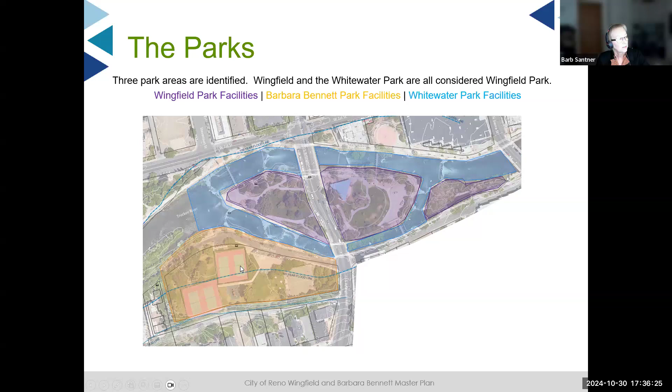So as we talk about the parks, we have them split up into three areas. We're going to talk about Wingfield Park, represented in purple here. And then the Whitewater Park, which is actually part of Wingfield Park, but we've separated it for purposes of presenting the amenities. And then Barbara Bennett Park, which is on the south side of the South Channel here.

So to do a bit of a recap on the parks, I wanted to remind everyone of what was involved in Concept A. Concept A was a plan that kept the existing amphitheater in the existing location and regraded the turf a bit.

This would have everybody able to look at the amphitheater in one graded area, replace a bunch of sidewalks with new vehicular rated sidewalks on both sides of the park, added some picnic nodes, added a pedestrian bridge to connect Wingfield to Barbara Bennett, and had the same alignment of the street and parking along the river, but we added a pedestrian walkway and trees.

And then we kept the two basketball courts, kept two tennis courts, and made this into pickleball courts, and shifted the playground and added shade structures over in this area. So that was the gist of Plan A.

In all three of the concepts, we have proposed replacing all of the existing lighting because it's pretty dated, and adding security cameras that would tie into the City of Reno's IT system so the activities could be more easily monitored. We also propose limbing up the trees so it's easier to see into the parks, and again, monitor the activity.

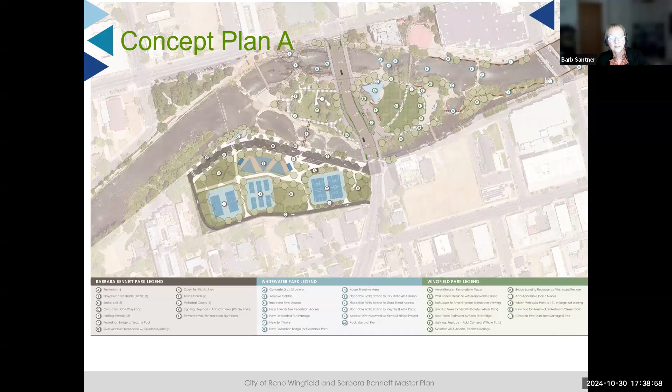So in Concept B, we propose leaving the amphitheater in the same location, but replacing the structure with a new structure that would really be a shade structure on some supports, not having solid walls in the background. The other aspects of the park were essentially the same as in Concept A for Wingfield, and the other aspects of the river improvements were also the same as in Concept A.

But in Concept B, this driveway and circulation is pulled back a bit from the river, having a larger pedestrian walkway feature. We had one basketball court, and then in this area a combined one basketball or one tennis court and three pickleball courts, and shifted the playground up in this area closer to the roadway.

I neglected to mention also that in both A and B, we proposed replacing the restroom and moving it a bit east. Another thing in A or B, in this area, we would have a pad for a portable green room restroom.

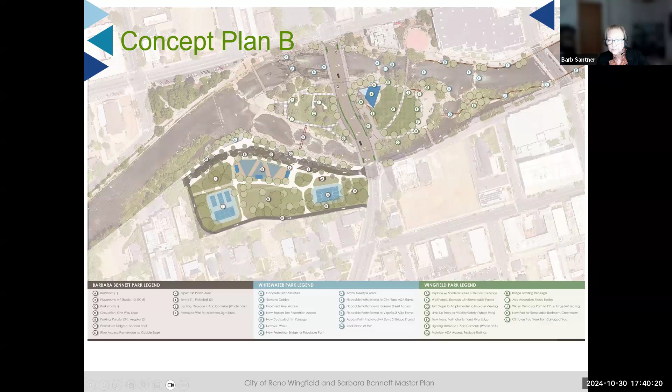Concept C had a bigger change in both parks. So in Concept C, we proposed removing the existing amphitheater and moving it down to the east side of the park and replacing it with a shade type of structure.

And then having this area near Arlington Avenue be used for food trucks and vendors and the portable restrooms. The biggest reason to propose this is because the natural grade from Arlington Avenue east falls in this direction. So by relocating the amphitheater, this can just be graded in a natural fashion, looking down at the new amphitheater.

And also, this provides really good natural flow of pedestrians from Arlington Avenue through the food truck area and restroom area down to the amphitheater.

So what that would look like is that the existing flood wall would be removed and this would be terraced back with boulders, just like all these other edges are terraced back when the Whitewater Park was built. It would afford a lot of new green space and access to the river on the South Channel.

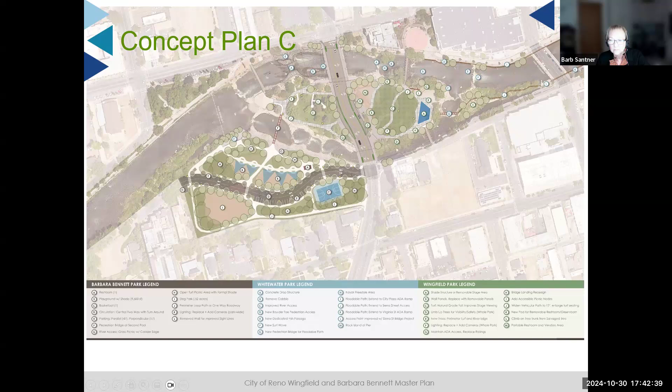So we presented those concepts last year, and then we had a survey. The public meeting where we presented those concepts was November 16th, 2023, and that was followed by an online survey, our second one, held this spring from March 4th to April 1st.

I wanted to add that at the actual public meeting, the sentiment on option C was higher. People definitely preferred C for moving the amphitheater, and also C for Barbara Bennett Park and realigning the road.

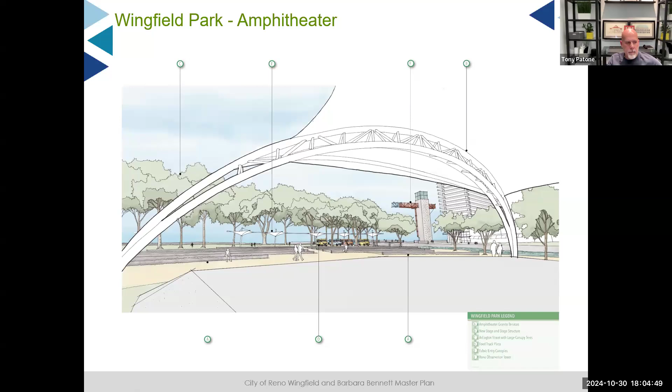All right, so Jack can talk about the observation tower. And Jack, at one point, I've got the video kind of queued up. So let me know when you want me to turn that on.

And you're on mute, by the way.

There you go, old man in technology. All right, I'm Jack on Robitussin. I'm fighting off a cold for the participants that are zoomed in. I'm not at my best, but I'll try.

I've been in Reno for 35 years, practicing architecture. This was a fun opportunity to work with Stantec and Barb and Dalton and Tony. Tony and I worked together several years ago, and I've been to many events at Wingfield, seen a lot of concerts there. It's got a special place in my heart. I feel like the park's a little bit long in the tooth, kind of like me. So it was fun to work on something to give it a whole fresh aesthetic and functions, and just a real pleasure to work on.

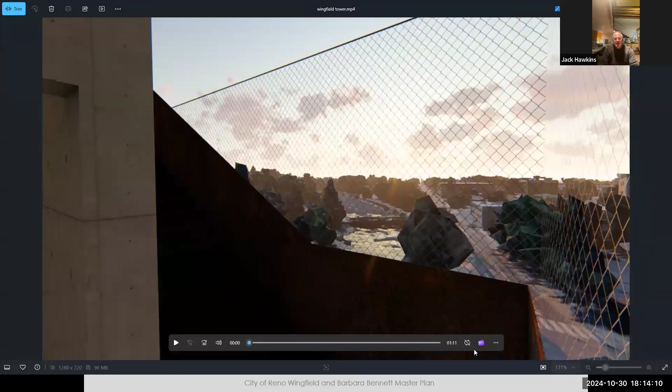That's the presentation for the tower. It's fairly ambitious, but we think it could be something really fun for the city of Reno, and just a great amenity to the city, particularly Wingfield, which is a very special park.

Uh-oh. What happened? Jack, right now the video is showing. Actually, I'm not sure if your screen is showing it. Oh good, okay, they're running the video. Great, no, I don't have it.

Right now this video is showing a lot of the great views that Jack mentioned. Once you get out to the end of the tower, looking down at the Truckee River, out to the Sierras, and this is a night view now. Tony, if you wanted to narrate this too, I wouldn't stop you. But I'm just trying to emphasize a lot of what Jack had been talking about in his presentation.

Basically, the materials would be rusted Corten steel and concrete, and glass are the three major materials. And I didn't mention, it does sit in a little pocket park right at the corner of First and Arlington.

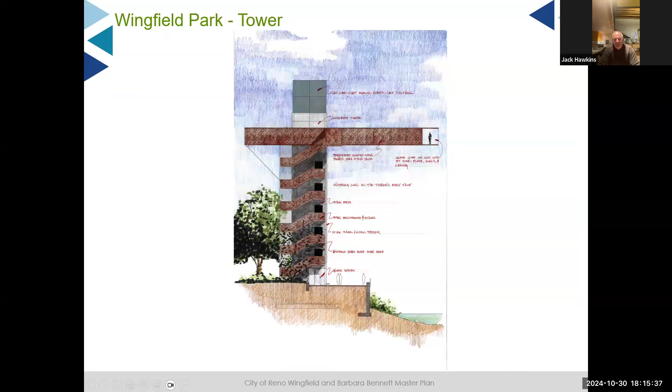Barb, I think you're muted if you're talking.

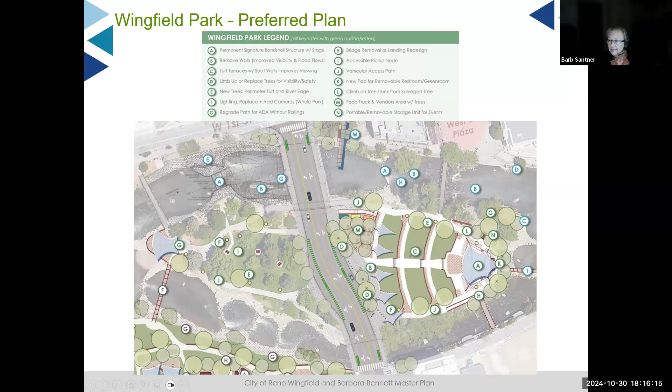Anything else you want to add on the tower? Jack or Tony? I think that's all for me. Tony, do you want to add anything?

No, I just think it'd be an incredibly beautiful, like you mentioned, a landmark for Reno City and for downtown Reno. A place that would draw people from, similar to, when Jack and I were discussing this, we mentioned some famous landmarks around the country, around the world, like the Bean in Chicago. It would become one of those iconic landmarks for downtown Reno, for Reno City, that would draw people and be an incredible feature for that part of Reno, located right on the Truckee River. It'd be an incredible amenity to the city, so it has a lot of potential, I think.

All right, well, thanks for all that information and detail.

So the next aspect of the preferred plan that we want to explain is the Whitewater Park improvements. Jake, are you okay going through these? Yeah, absolutely, happy to.

This is pretty similar to what's been shown before for those keeping an eye on this, working from upstream to downstream on the north channel. The first thing you see is reconstructed drop two, which is actually part of Arlington Bridge. We're really just showing it here for reference. That will be happening next summer already.

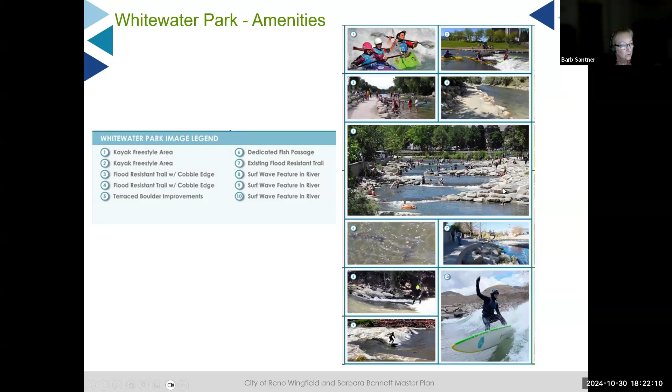Terrace this bank back using this terrace boulder so that it is similar to all these other nicely done edges at Wingfield Park.

We're showing replacing the current restroom with Portland Loo style restrooms, which are the ones that are now being used down on the river. They allow one person in them, and you can kind of see underneath so that there's less opportunity for undesirable activity in those restrooms. So we're proposing two of those.

And then this would be the accessible parking for those restrooms in diagonal parking. But this circulation would be one way coming in and one way going out, just like it is now. So that's a modification from our concept C, in that we're basically leaving the path and circulation route the same, but just moving this internally.

This area is for people to access this ramp. This is actually a ramp that's going to be modified with the Arlington Avenue Bridges project, where it's going to be widened so vehicles can get down into the river, so people unloading boats can bring them down in this area too. This is also ADA accessible.

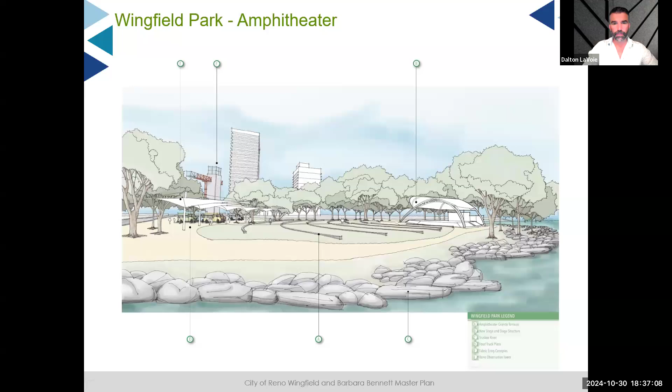The next question is about whether there is light for the courts in the works. Barb, I'll defer to you or Karina on that question. I don't believe we have proposed separately lighting the courts. We are proposing to improve the overall park lighting and replace it with upgraded pedestrian lighting, but at this time we did not propose specifically lighting the courts. That's right, Barb, I agree with that. Okay.

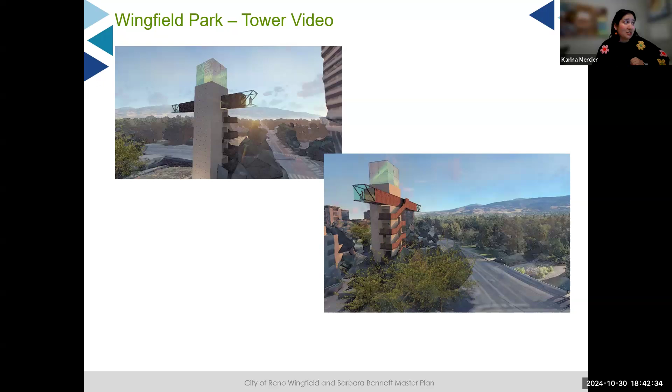So we do have a short number of polling questions that we'd love it if you attendees would answer. It would help us just kind of get a read on our proposed park improvements. So Karina, maybe you can explain how they're going to do that.

Yes, okay, so right now I'm launching the poll for Wingfield Park. It should appear as a pop-up on your screen and it should be interactive, so you should be able to click in the responses. This first poll has 5 questions. The first question is: do you support the new band shell structure and stage with the removable restroom/green room? Only 2 options there, yes or no.

And we should be seeing your results pour in as you answer that. I see a few of you have started, thank you so much. You should also be able to scroll, I see some of you have started doing that. There's an additional 4 questions.

The second one is, do you support turf seating terraces, yes or no? Question 3 is, do you support locating vendors and food trucks near Arlington Avenue? Question 4 is, do you support the observation tower? And then question 5 has multiple choices: do you support the plan overall as presented, with strongly support, moderately support, neither support nor oppose, and do not support.

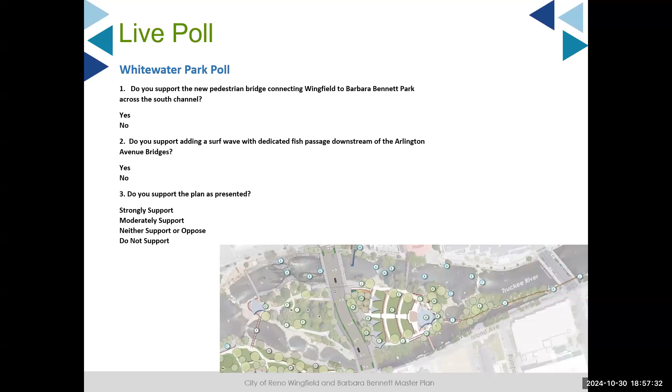But my big concern, and I have expressed it to all of you before, is my concern about wildlife, in particular ducks, invertebrates, and fish, whether there's going to be room for anything else but recreation that is not good for wildlife. And I have not seen that addressed in any of the park plans that you have developed. Any sense of responsibility to them, and taking the lower branches out of trees so that you have more security, what is the impact of that on bird life, rabbits, and other species? Does the City of Reno have any obligation to help protect wildlife?

So I think a lot of this is really nice, but it's indifferent at best to wildlife, and increasingly anti-wildlife. So I am not answering your polls as much because I feel that a lot of issues were not addressed.

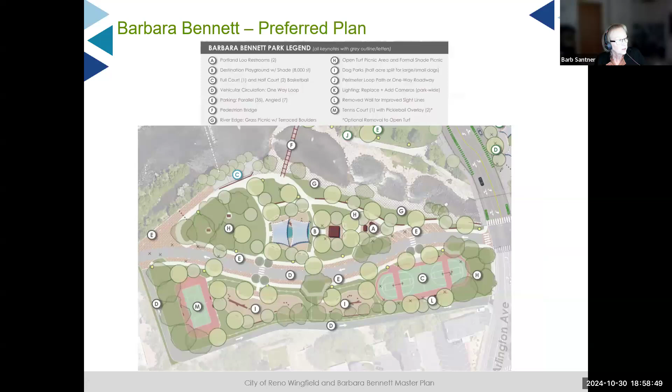I want to address part of that, the questions or comments that you made, Tina. And that's because I'm realizing that I neglected to even talk about one aspect of the master plan, which is basically our tree plan. So we are showing in this overall plan, we've got a legend that shows existing trees to remain.

We've got new trees that are going to be planted with the Arlington Avenue Bridge project, primarily along Arlington Avenue, but there are a couple of new ones that will be put in place with that project. But we do recognize that this is an island in the river and that we need to perpetuate the trees that we have.

I do think there have been quite a few trees lost over the years. And as a person who literally goes to this park all summer long and to so many special events, I think that we've lost a lot of trees on this island. And I know, having worked on the Arlington Avenue bridges, that there are some old cottonwoods that are really at the end of their lifespan.

So we are proposing to have a plan to replenish the trees that are being lost just due to age, and that's what some of these lighter green circles are. So I can't say, to be totally honest with you, that that was 100% thought of for wildlife, but it is partially, because I recognize that the fisheries here need shade to thrive.

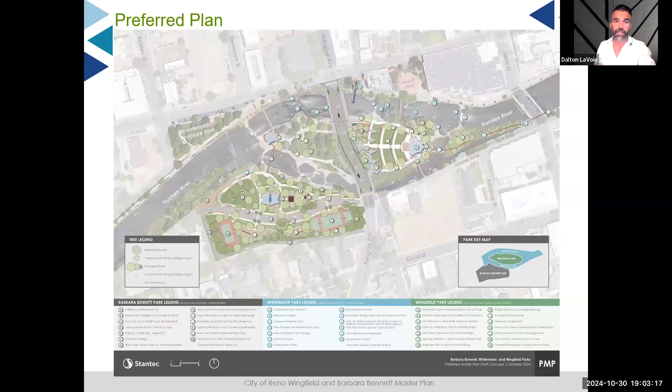Thank you. I realized I was also remiss—I did not touch on the low flow fish passages. So there are dedicated fish passage channels at low flow that are very naturalized and rough, not engineered fish passages like you see at dams. Additionally, dredging the channels provides a lot more of that deep pool habitat that's great for fish, and we see amazing fish habitat even among these recreational structures.

Thank you. Thank you, Tina. All right.

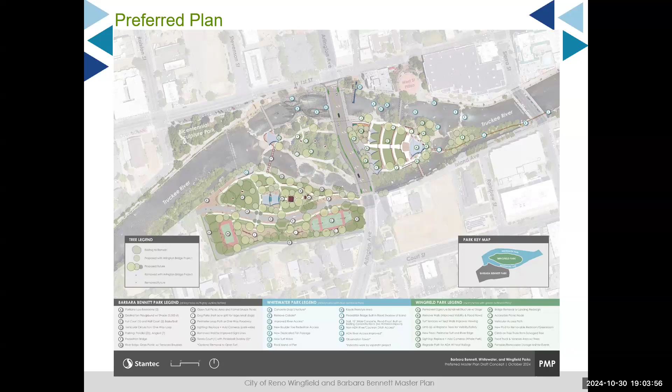Did we see the results on the second survey, Karina? Oh, sorry. Yes, I was curious.

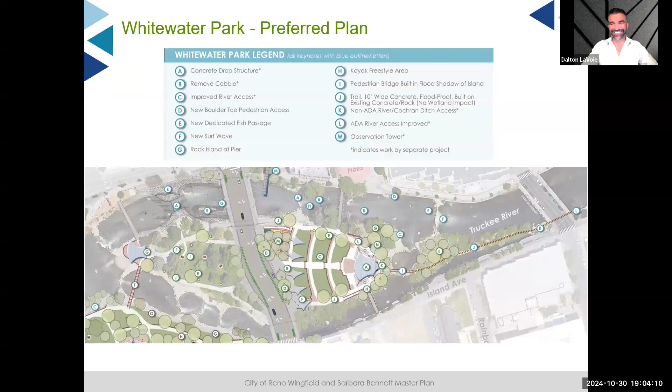Here are the results for the Whitewater Park poll. Question 1, 79% responded yes. Question 2 had an 85% response indicating yes. And then question 3: 57% strongly support, 29% moderately support, and 2 respondents indicated they neither support nor oppose.

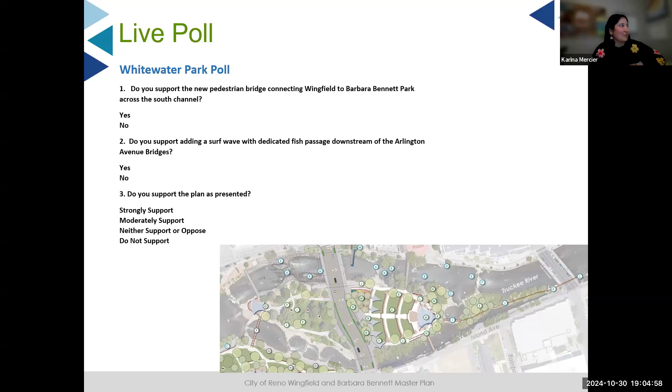Sorry, I thought I was sharing those results with you, but I guess I just did it verbally. Here is a look at the Barbara Bennett poll. We had 90% yes support for removing the flood wall and providing the bouldered river edge. On question 2, it's pretty split—group picnic shelters came in as the top answer with 80%, and the dog park came in last with only 30% support. For question 3, we have a mixed bag: 44% strongly support, 33% moderately support, 11% neither support nor oppose, and 11% do not support.

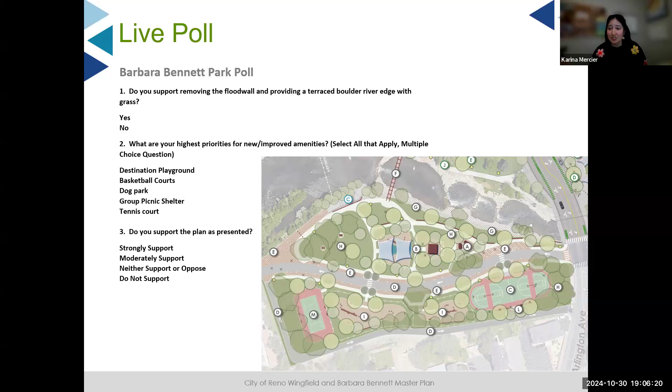So thank you all. As I mentioned, a recording of this meeting will be available for anyone who was not able to attend, accompanied by a form you can fill out with these questions so we can gather additional input. I'll also make a comment box available so that comments that don't pertain to these questions can be captured. Thank you so much for your time today and for joining us—we're excited about this project and these parks, making them a great place to be and to visit downtown.

So yeah, we're nearing the end of the process, and I really appreciate your participation. It's super valuable for us, and we really look to your input to make improvements on our master plan overall—it's very important for our whole team. Please be on the lookout on our website, reno.gov, the Parks and Recreation page, where we'll post the recording and the link to provide feedback. Your feedback is invaluable, and we thank you for being here and taking time out of your night. I hope you all enjoy your evenings.